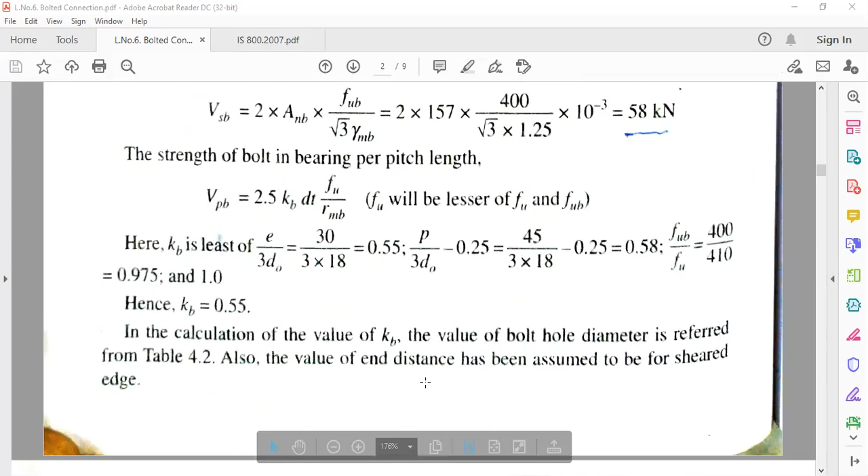We need to calculate the strength and efficiency of the joint, if four bolts are provided in the bolt line at a pitch of 45 mm, as shown in the figure. There are two types of figure given: one where the bolts are displayed in a single line, and another where the same four bolts are arranged in a double line, like a rectangular profile.

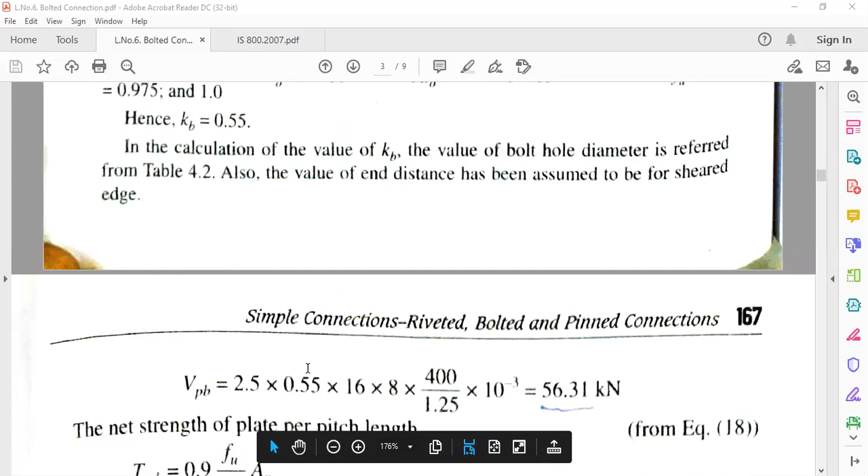Here it is a single line. The pitch, which is the distance between two consecutive bolts, is mentioned as 45 mm.

Also determine the efficiency of the joint if two lines of bolts with two bolts in each line are arranged to result in a double bolted double cover butt joint. So they have given a double cover butt joint with plate thickness of 8 mm, cover plate thickness of 6 mm, bolt diameter of 16 mm, grade 4.6, and pitch of 45 mm. We have to calculate the efficiency for both the single line and double line arrangements.

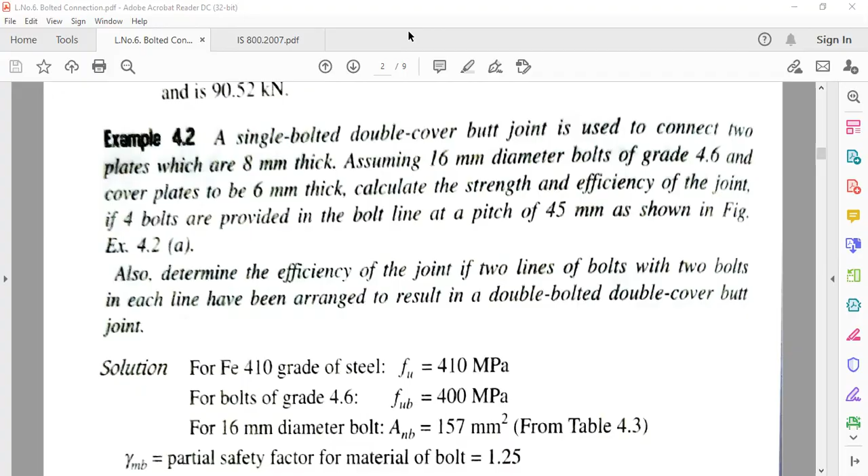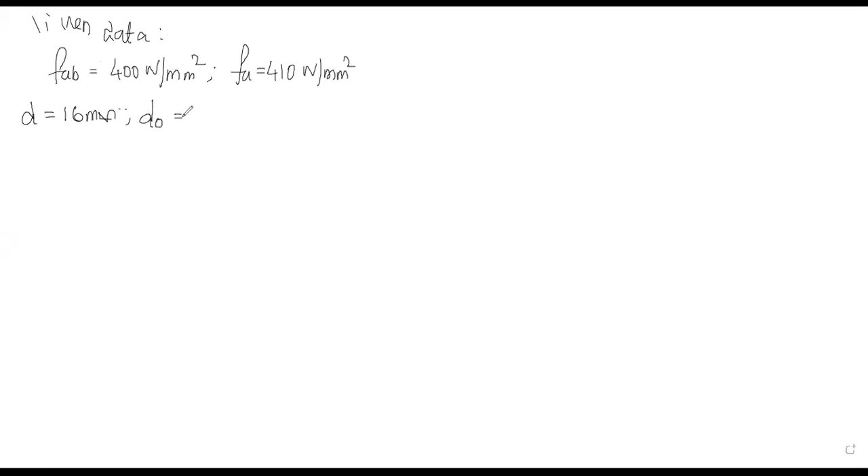Let's move to the solution. From the given data, FUB equals 400 Newton per mm square, which is the ultimate strength of the bolt. FU is the ultimate strength of the plate, assumed to be 410 Newton per mm square. The diameter of bolt D is given as 16 mm, so automatically D naught, the diameter of the hole, becomes 16 plus 2, equal to 18 mm.

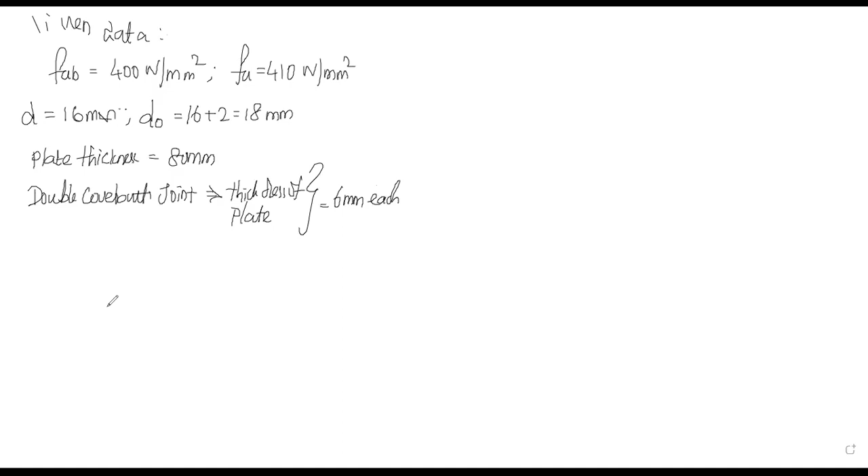Next, they mentioned the double cover plate thickness. The plate thickness is equal to 8 mm, and for the double cover butt joint, the thickness of each cover plate is equal to 6 mm. So these are all the given data.

Now, first we need to find the efficiency if the bolts are in a single line, given the pitch P is equal to 45 mm. Next, we find the efficiency if the bolts are in a double line.

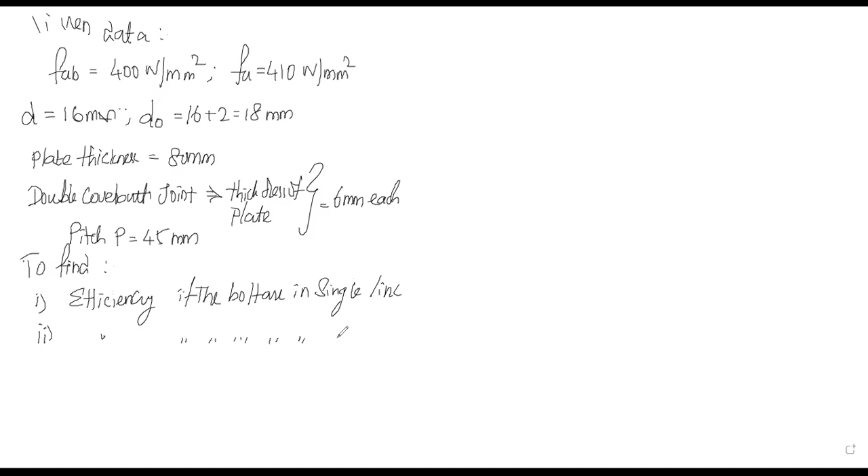They have mentioned 4 bolts in the diagram. We have to find the efficiency for both single line and double line arrangements, as shown in the diagram with 4 bolts.

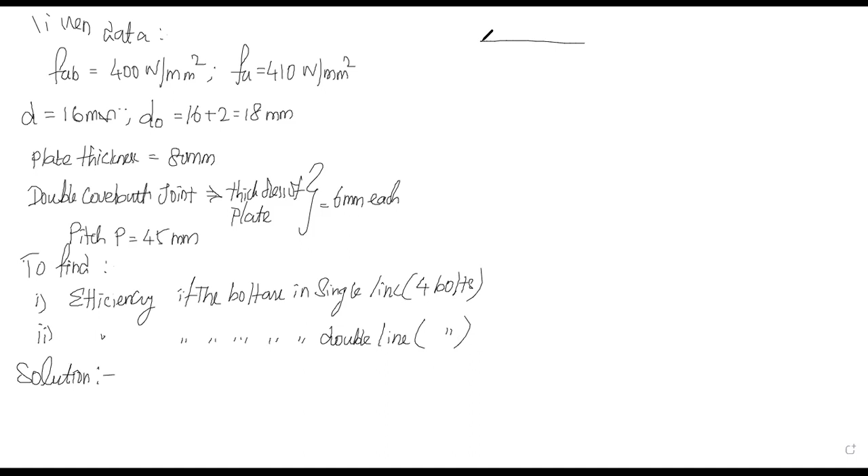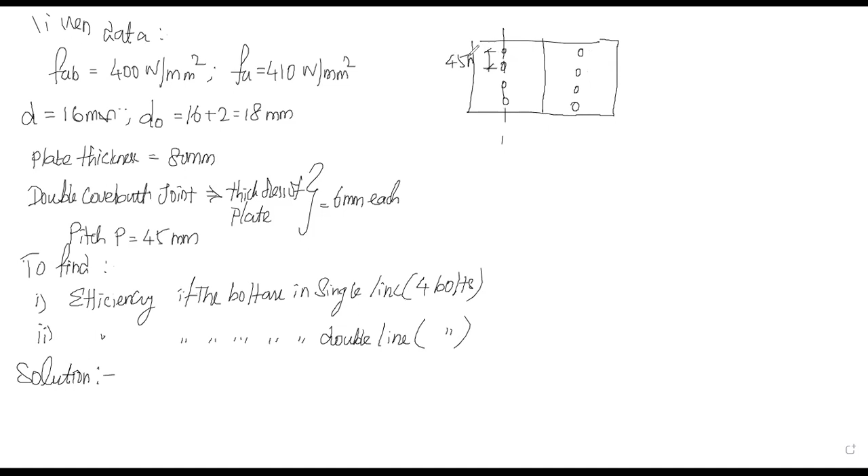Now let's move to the solution. In the figure there are two categories. In the first setup, the pitch is 45 mm in a single line. In the second category, the pitch is also 45 mm but arranged in a double line, with the same plate. For both the first and second categories, we are going to calculate the efficiency.

The formula for efficiency of joint is equal to strength of bolt divided by strength of the solid plate, multiplied by 100. This is the formula we are going to use.

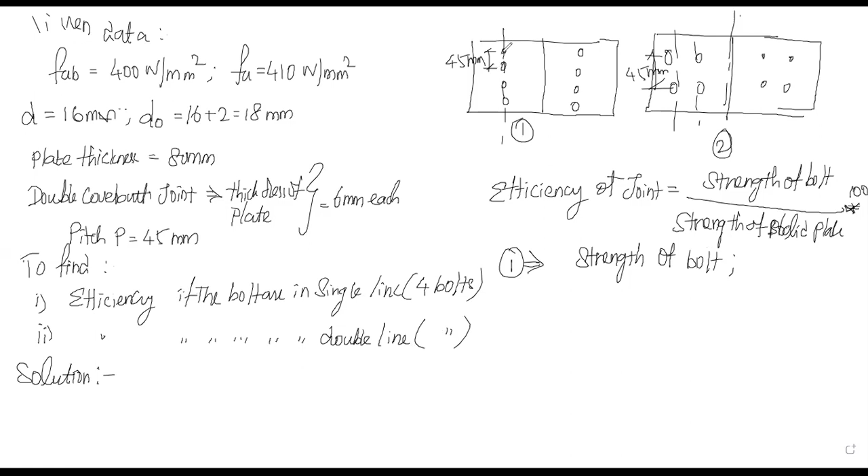Now for the first criteria, we calculate the strength of the bolt. We have to consider shear, bearing, and tension failure. The plate also gets tension failure. One thing to remember: since there is a single line, single shear is going to occur. But since it is a double cover butt joint, we are going to get double shear here.

So if I'm going to place the bolt here, on this shear plane and here another shear plane. So double cover, double shear.

So strength of bolt in shear. We know the formula VDSB is equal to VNSB by gamma MB, whereas VNSB is equal to, so gamma MB value we have taken from page number 30 in the table. So VNSB is nothing but FUB by root 3 into NN into ANB plus NS into ASB.

So here both are we are going to consider as a shank portion. So FUB is 400 divided by root 3 into NN. So 1 into ANB, so 0.78 into pi by 4 D squared, so dia of bolt is 16 square. Similarly, plus NS also we are going to take same 0.78 into pi by 4 16 square.

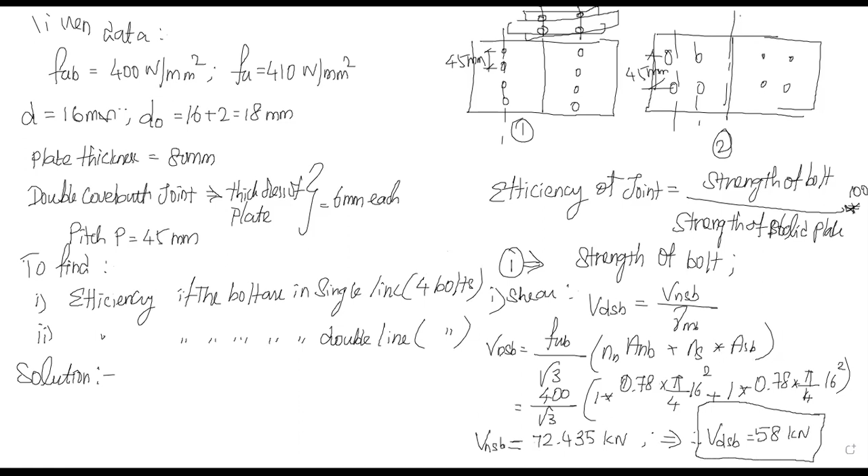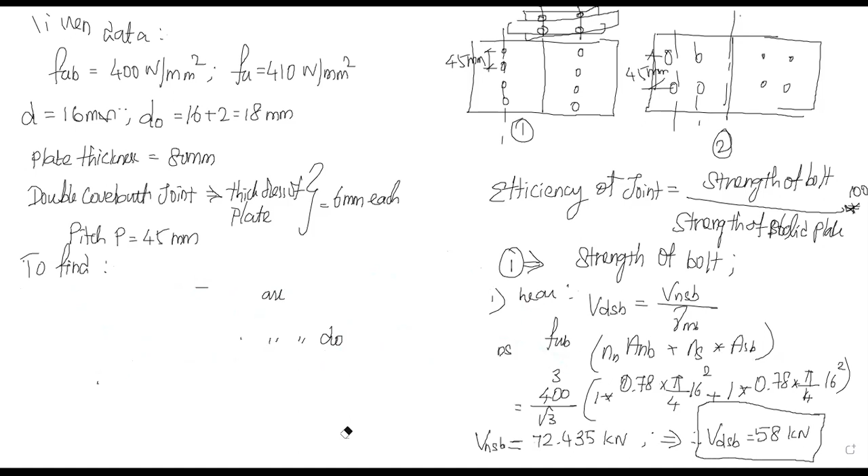So I will clear all the values. Second one is with respect to bearing strength of bolt.

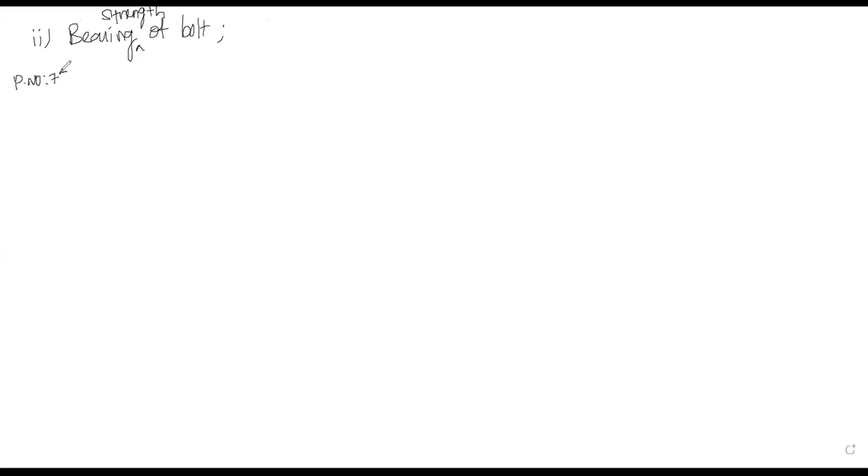So what we are going to do? From our page number 74 or 75 of IS 800 2007, the formula becomes VDPB is equal to VNPB divided by gamma MB, whereas VNBP is equal to 2.5 into KB into D into T into FUB.

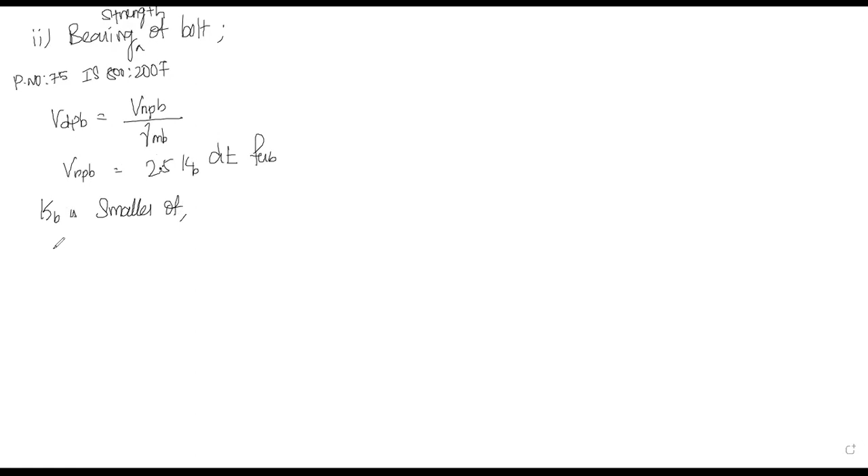So here KB is smaller of E divided by 3 times of D naught, comma P divided by 3 times of D naught minus 0.25, comma FUB by FU, comma 1, whichever is less.

So first edge distance E is equal to 3 times of D naught we are going to take. So 3 into D naught we have taken as 18, so 3 into 18 becomes 54 mm. So 54 mm, therefore 54 divided by 3 into 18, comma pitch they have given as 45, 3 into D naught minus 0.25. Next one is 400 divided by 410, comma 1. So 54 divided by 3 into 18, the value is 1.

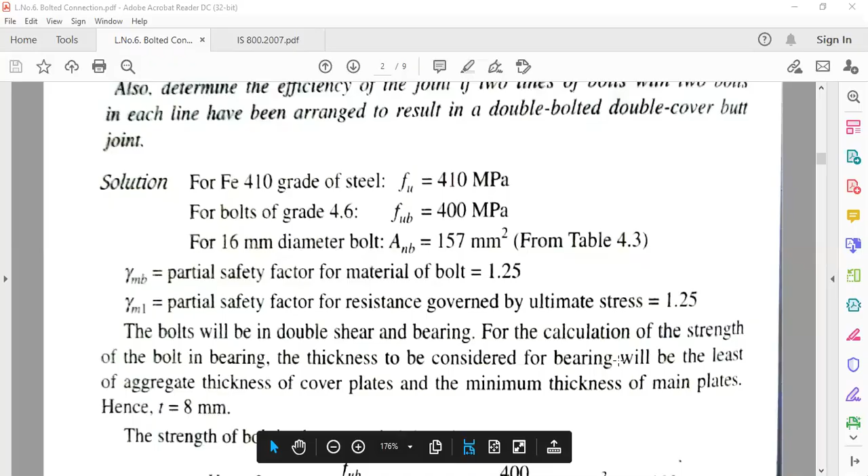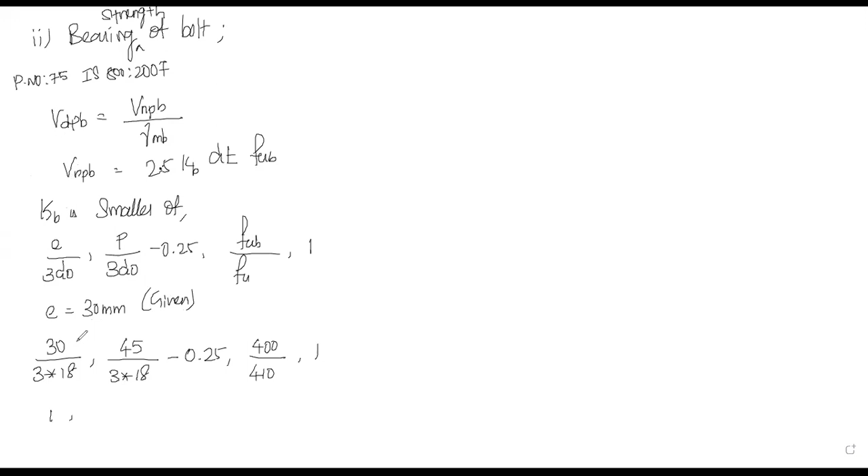So let us move on to the problem again. So E value they have given as 30 mm. So E value is 30, so 30 divided by 3 into 18, so 0.55, comma 45 divided by 3 into 18 minus 0.25.

So it becomes 0.58, comma 400 divided by 410, it becomes 0.975, comma 1. Among them, this is the small value, so KB is equal to 0.55.

Next, we should move on to the values. That is VNBP is equal to 2.5 into KB value is 0.55, and D dia of bolt is 16 mm, and the thickness of plate.

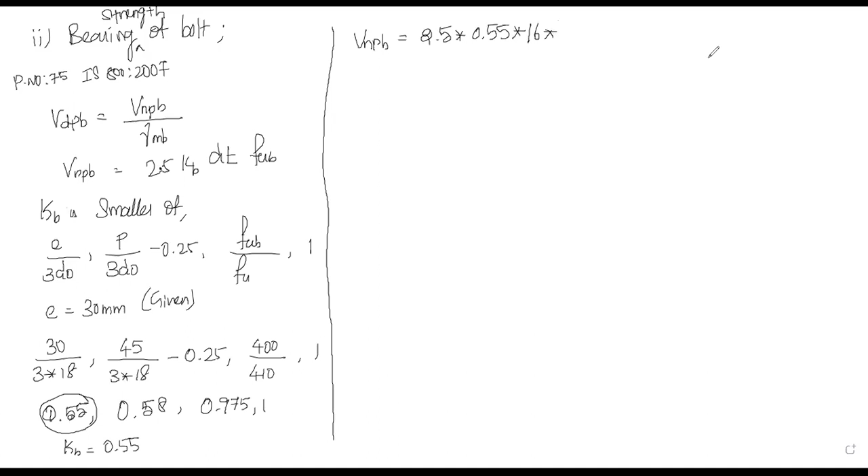So you may have one doubt. So the regular plate, whatever we are going to join now, that is 8 mm. Now cover plate we are going to keep 6 mm too, so together this is 6 mm and this is 6 mm, so together it is 12 mm, 2 into 6 mm, it becomes

12 mm. So among them, this 8 and 12, whichever is less, this 8 is less, so that we are going to take it. So 8 into FUB, that is 400. Therefore VNPB is equal to 2.5 into 0.55 into 16 into 8 into 400, answer divided by gamma MB

if I am going to give, so 70.4 we are getting, 70.4 kilonewton we are getting. Therefore, VDPB is equal to 70.4 divided by 1.25, so 56.320 kilonewton. This is the value of bearing strength of bolt.

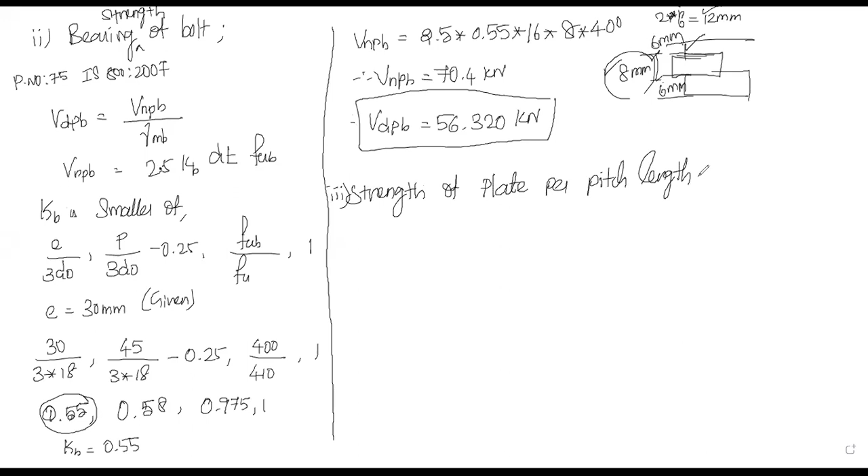Next we have to calculate the strength of plate, the third one, strength of plate per pitch length. So why am I saying this? For bolt, we are going to take shear and bearing. Similarly for plate, bolt and plate, all the things we can have. Even if bolt is strong and the plate fails, that is also a failure. So we are going to calculate the strength of plate also, based on these three values: shear strength of bolt, bearing strength of bolt, then strength of plate per pitch length. Among these three, whichever is less, that is the strength we are going to take.

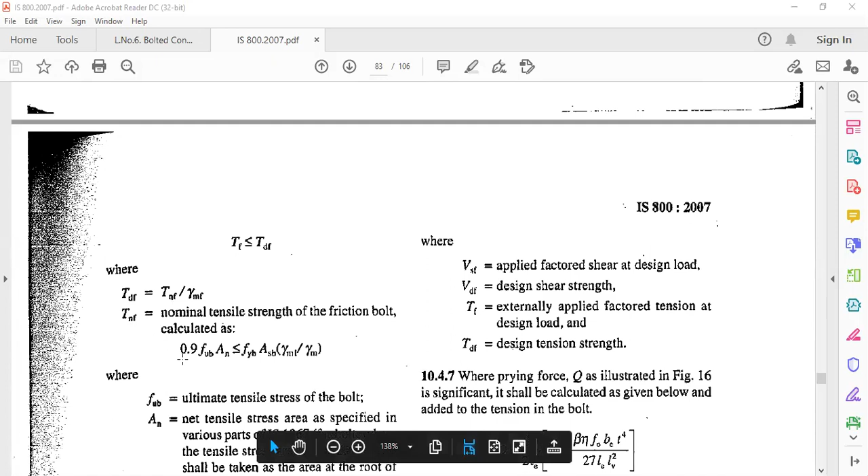So now we should move on to that. This formula we can refer from IS 800. In IS 800, page number 77, the value is available. That is tension resistance: 0.9 into FUB into AN. So this is the formula we are going to use.

If it is bolt, then we are going to use FUB. If it is plate, then we are going to use FU, that is ultimate strength of plate. So here we are going to use, for plate, ultimate strength of plate, 410 Newton per mm square.

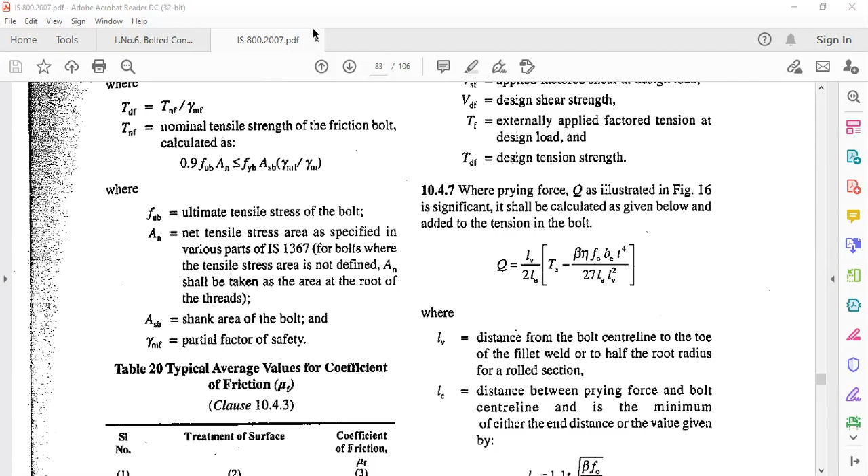Let us move on to the problem again. So the formula becomes TDN is equal to 0.9 into FU into AN divided by gamma M1. Gamma M1 value we are going to take from table number 5, page number 30, from IS 800, that value becomes 1.25. Now we are going to calculate the strength per pitch length.

So net area becomes - here a bolt is there, here a bolt is there. The center to center distance becomes 45 mm. In that, the dia of hole we have to deduct. Here half of the dia, here half of the dia is available. So the net area becomes the length 45 minus dia of hole, that is pitch minus dia of hole, into thickness of plate. So pitch is 45 mm, minus dia of hole is 18 mm, into thickness of plate is 8 mm.

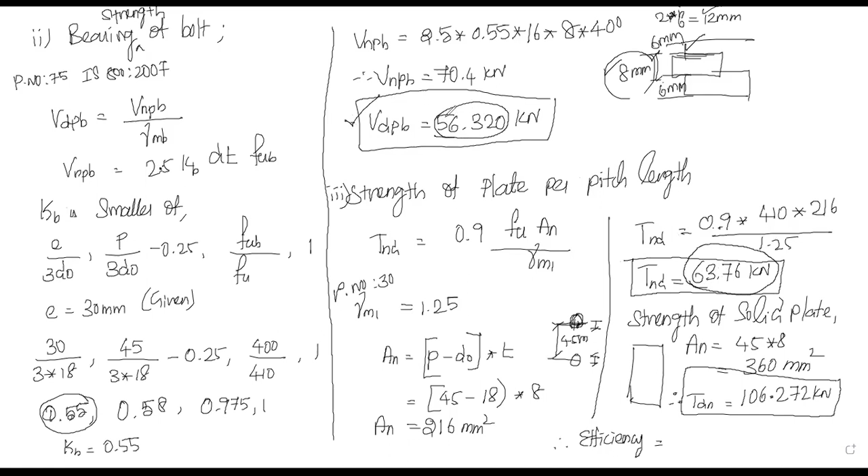Now efficiency. For the first question, efficiency is equal to strength of joint divided by strength of solid plate - among these three values, bolt as well as plate, whichever is less, we have to take. For shear, the value is 58 kilonewton. For bearing, the value is 56.32 kilonewton. For tension of plate, the value is 63.76. Among them, the least value is 56.32 kilonewton.

56.32 kilonewton divided by TDN, that is strength of solid plate, 106.272, into 100. So how much value? 56.32 divided by 106.272 into 100 gives 53 percentage, that is 52.99 percentage. 53 percentage is the efficiency of that bolted joint, if it is placed in a single row. So if it is in single row, whatever we discussed, this is the efficiency we are getting.

Now we are moving on to: if the bolts are placed in double line, then what is the efficiency - that we are going to discuss.

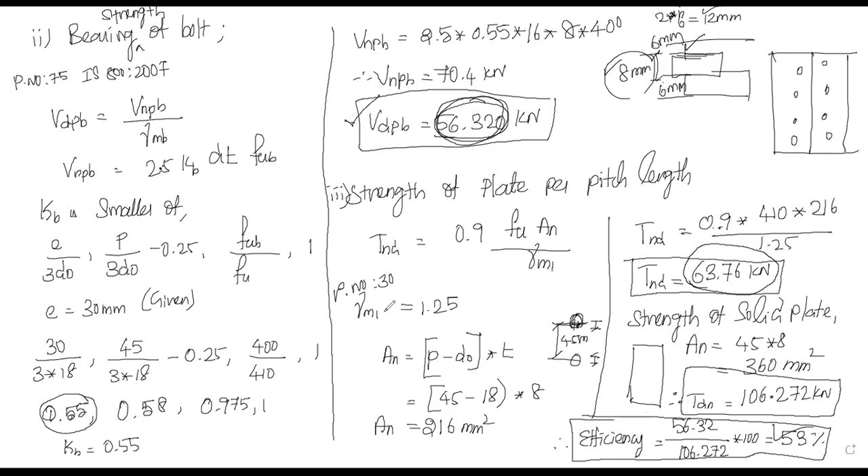So let us move on to the topic. Second criteria, efficiency of joint, if the bolts are in double line. First, let me draw the diagram as given.

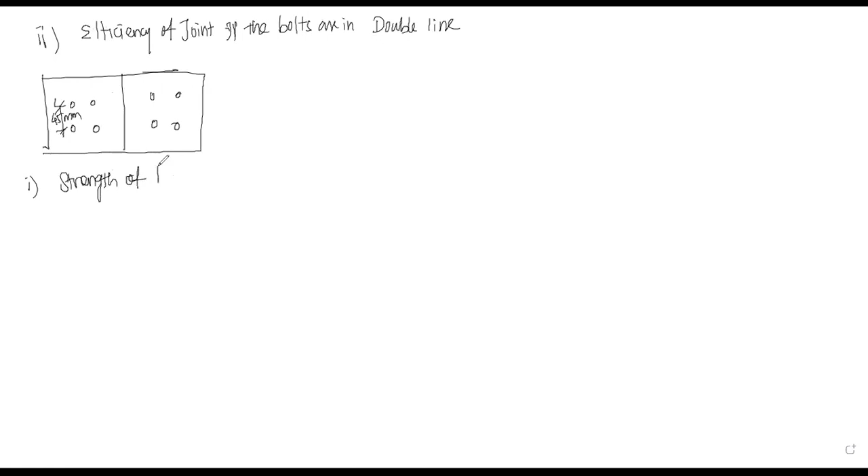So this is pitch length 45. The thing won't change, that is as usual. First one, strength of bolt in shear.

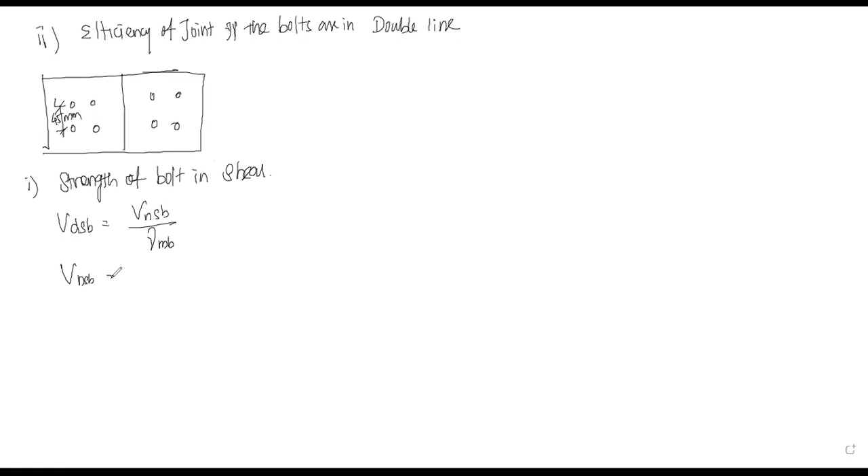The same formula, VDSB is equal to VNSB by gamma MB. Here also VNSB is equal to FUB by root 3 into NN into ANB plus NS into ASB. Here also double shear, since they have mentioned double cover butt joint, so one cover is here, one cover is here. If I place the bolt here, here I can get shear, here I can get shear, so it is double shear. The value won't change. VNSB, that is VDSB, becomes 58 kilonewton.

The thing is, the bolt has been placed in a double row. Here one is available and here one is available. If I apply the force, it will resist two times instead of a single time. So this value can be multiplied with 2. So 58 into 2, 116 kilonewton is the value.

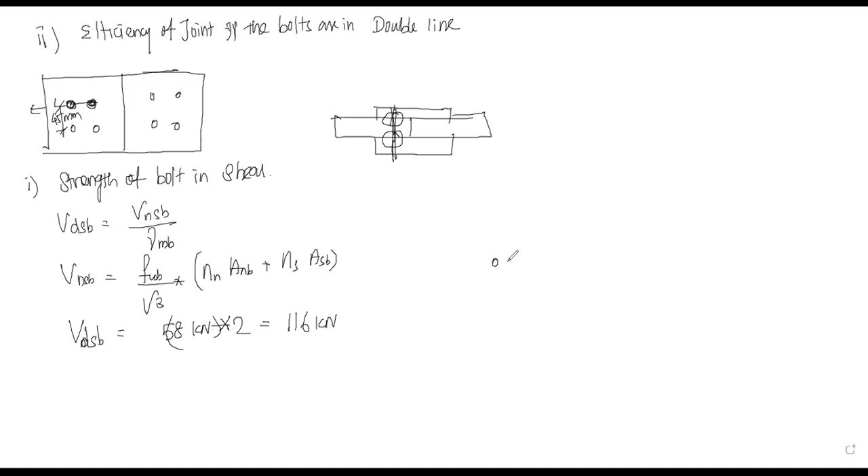One thing we have to remember: if I'm applying the force here, this bolt also resists some force, and this bolt also resists some force. So as the number of rows or columns increases, when applying in the direction of force, automatically the resistance also gets increased. Based on the number of bolt lines, we multiply the values in the corresponding strength. So shear is over.

Second one is strength of bolt in bearing. VDPB is equal to, earlier we got the answer as 56.32 kilonewton. Multiplied with 2, so 56.32 into 2 becomes 112.64 kilonewton. Next we should move on to strength of plate, that is strength of plate per pitch length.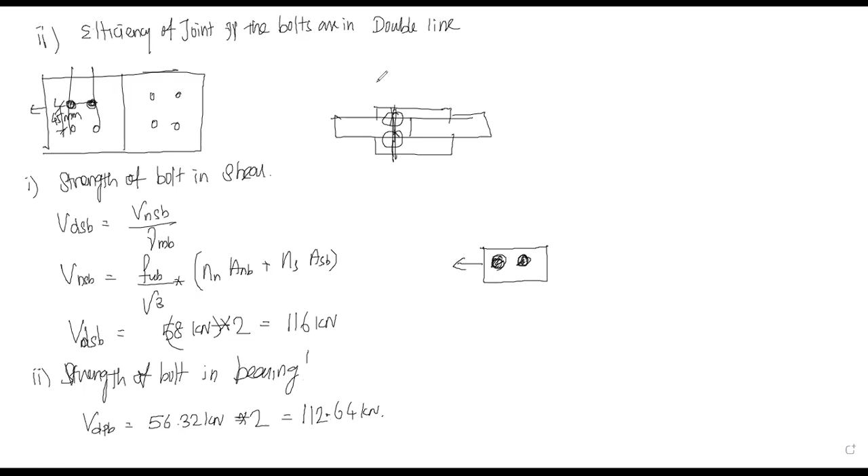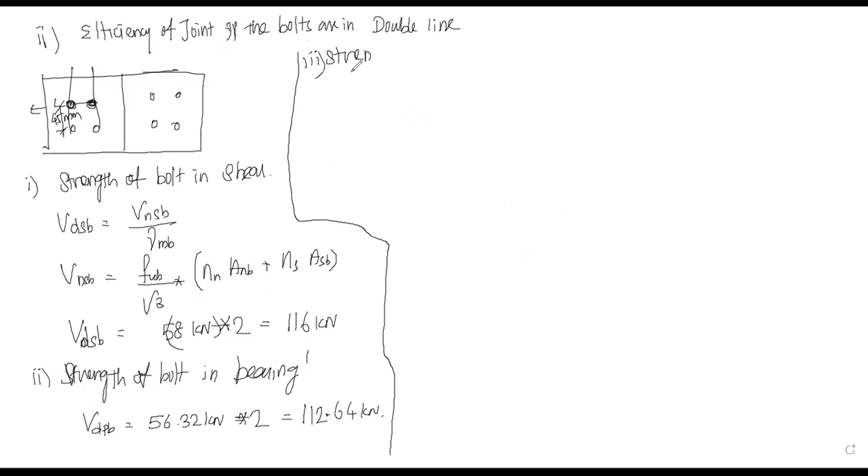That is the third one, strength of plate per pitch length. Here, as usual, one bolt is here, one bolt is here. By placing together, the pitch length won't change, 45 mm, so we get the same value.

Earlier we have seen that TDN is equal to 0.9 into FU into AN divided by gamma M1. Gamma M1 is equal to 1.25, and the AN value for this is 45 minus 18, that is P minus D naught, dia of hole, into thickness. Thickness is 8 mm, so 216 mm square we got. If I substitute this value, the TDN becomes 63.76 kilonewton.

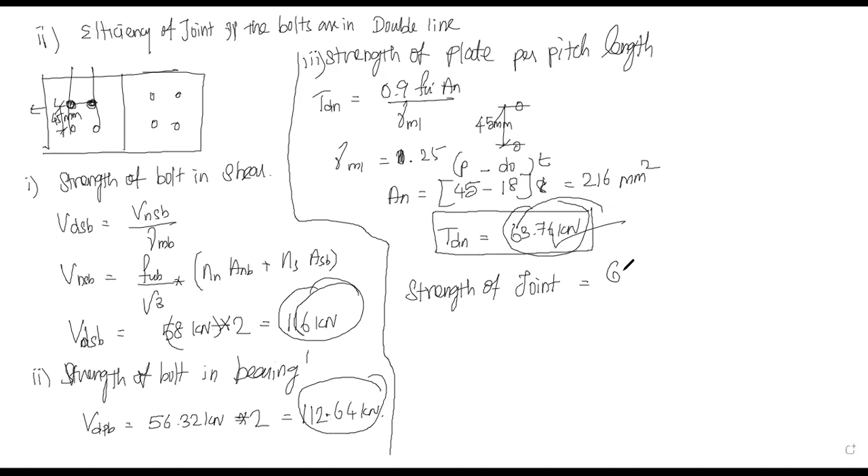So now the strength of joint or strength of bolt is nothing but the least of these three values: 1, 2, and 3. Among them, this is the least one, 63.76 kilonewton is least. Therefore, strength of the joint is this value. Now for strength of solid plate.

TDN is equal to 0.9 FU into AN divided by gamma M1. AN value is 45 into thickness, thickness is 8 mm, so 360 mm square. The value of TDN for strength of solid plate becomes 106.27 kilonewton.

Therefore, efficiency of joint is equal to strength of joint divided by strength of solid plate, multiplied with 100. So the value becomes 63.76 divided by 106.27 into 100, which gives 59.99, so it is nothing but 60 percentage. So this is the answer.

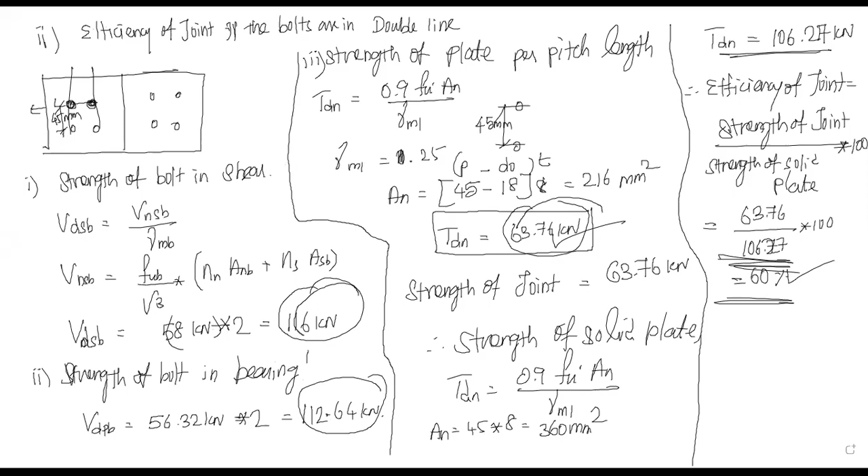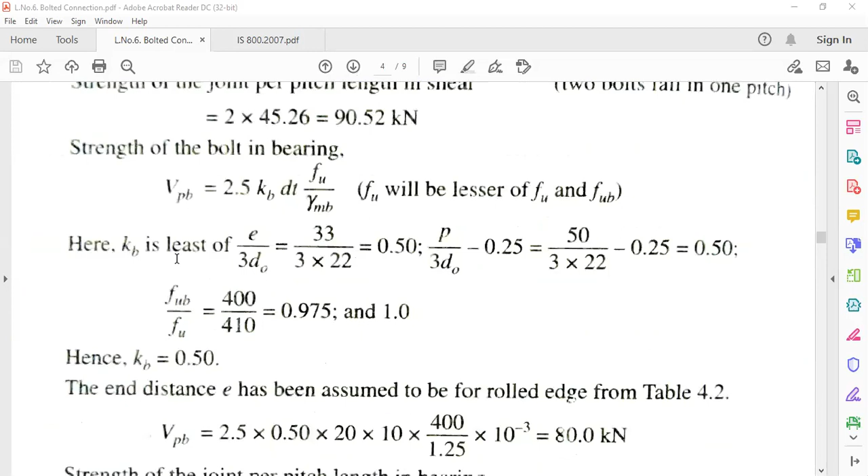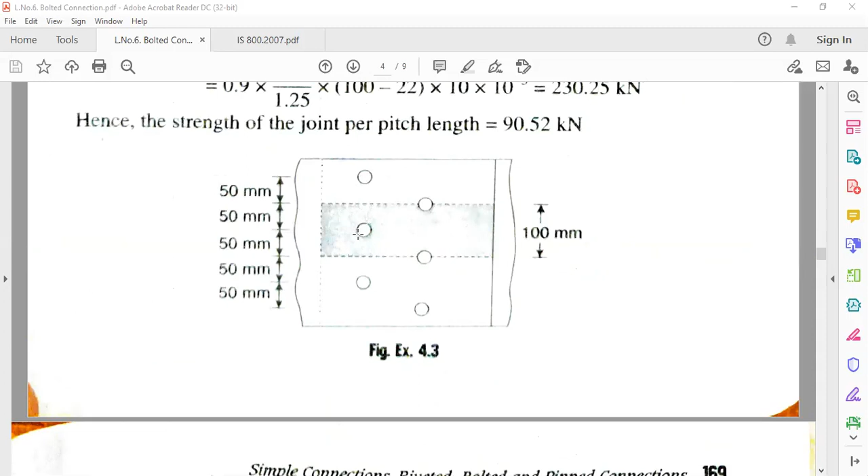So the next problem: determine the strength and efficiency of the lap joint as shown in figure 4.3. Here the plates are given, and the bolts have been arranged in a zigzag way. So if it is in zigzag way, the pitch length, one bolt to another, the distance is 100 mm. Similarly here, one place to another place.

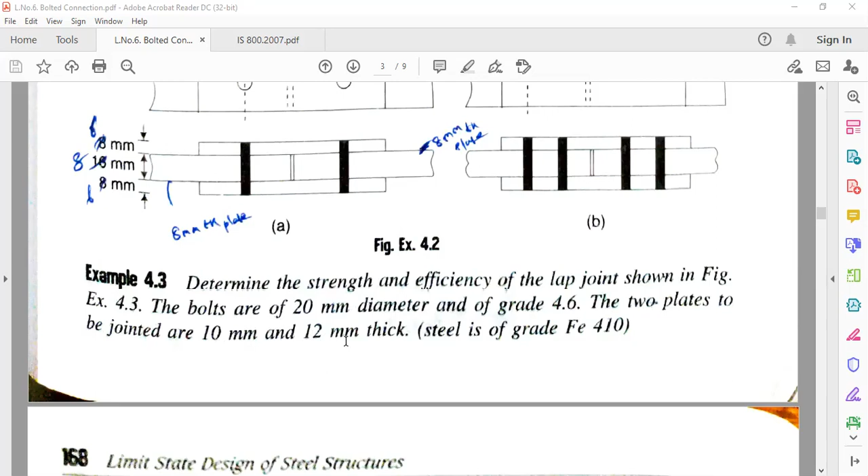What they have asked: the bolt diameter is 20 mm, so D value is 20 mm, grade is 4.6, so FUB becomes 400 Newton per mm squared. The two plates to be joined are 10 mm and 12 mm thick. So joined plates are 12 mm and 10 mm, one plate is 10 mm, another plate is 12 mm. So we are going to join the lap joint.

Now let us move on to the solution.

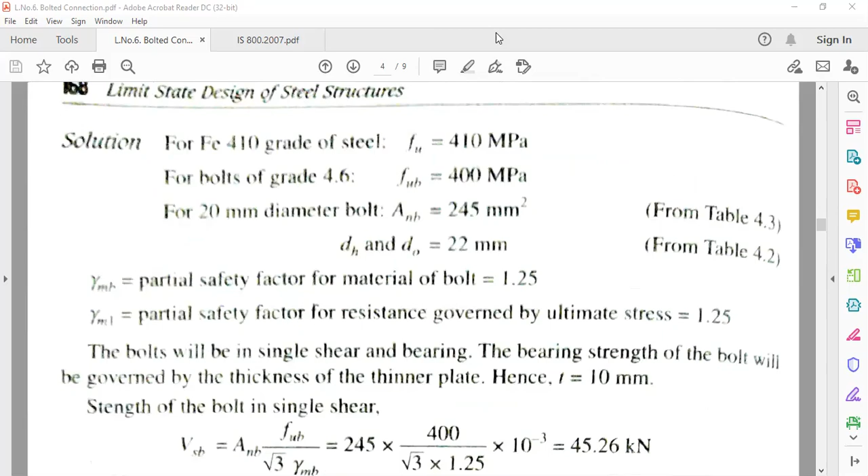The given data: FUB is equal to 400 Newton per mm squared. FU is 410 Newton per mm squared. It is a lap joint they mentioned, and dia of bolt they have mentioned as 20 mm. D is equal to 20 mm.

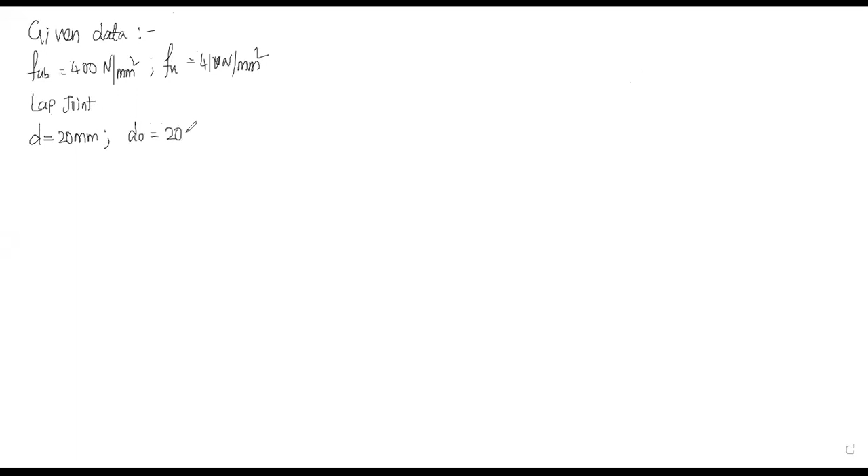So D naught we have to add 2 mm, 20 plus 2 mm. This is from page number 73 of IS 800, the values are given. That's why I'm going to take 2 mm as clearance. So dia of hole is equal to 22 mm, D naught.

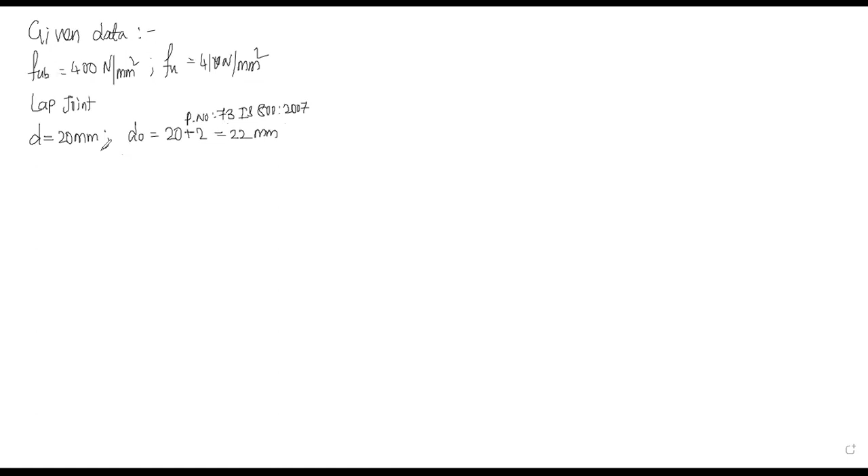Next, lap joint: one plate thickness is 10 mm and another plate thickness is 12 mm. So there are two plates. Let us move on to the solution. Find the efficiency of the joint.

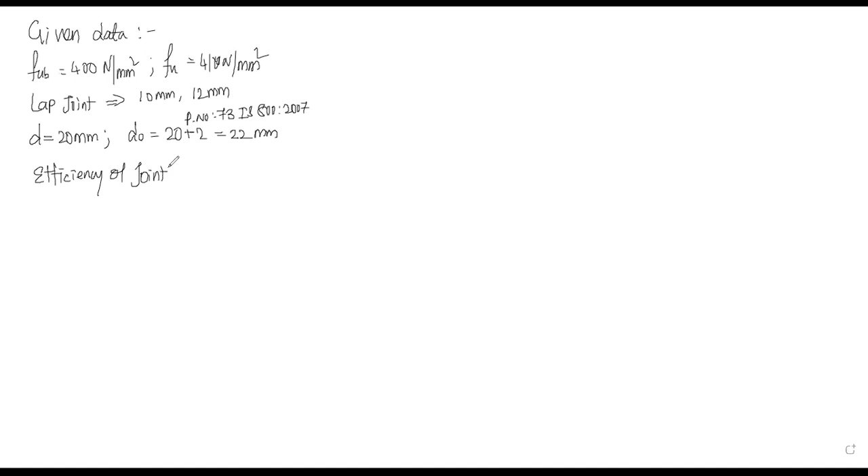Now they have mentioned the diagram, that is two bolt pitch arranged like this. So one pitch is 100 mm, the center to center distance between the two bolts. They didn't mention the edge distance, so that we are going to calculate.

So next we should move on to the problem. First, strength of joint we have to calculate. So efficiency, what is the formula? First we note down the efficiency formula, then we will move on.

So efficiency of the joint is equal to strength of joint divided by strength of solid plate, into 100.

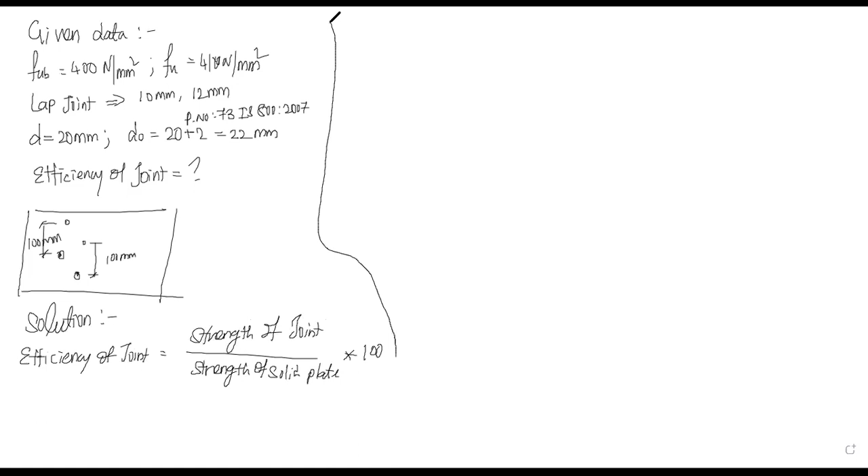So strength of joint is the least of: first, strength of bolt in shear; second, strength of bolt in bearing; third, strength of plate per pitch length. So these things we have to calculate now.

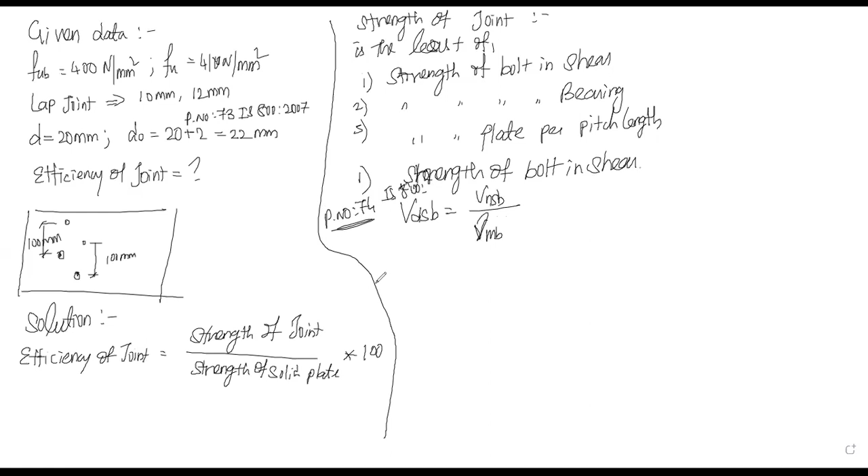So first one, strength of bolt in shear. The formula VDSB is equal to, from page number 73 or 74 of IS 800: VDSB is equal to VNSB by gamma MB, whereas VNSB is equal to FUB by root 3 into NN into ANB plus NS into ASB.

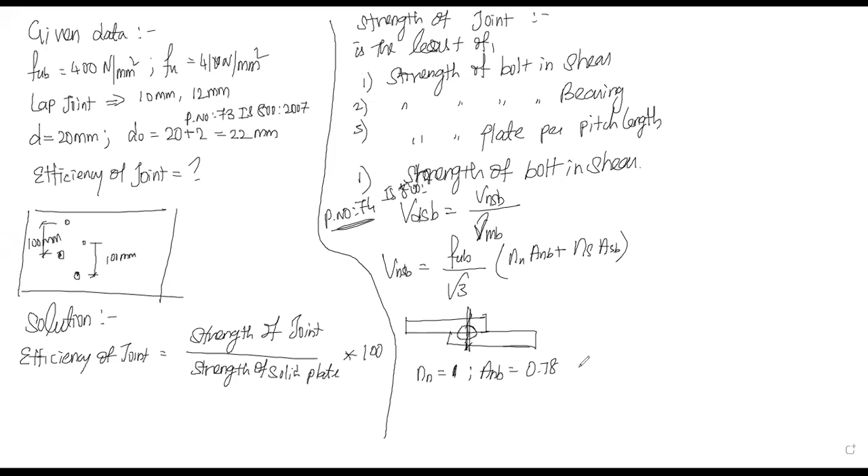So here lap joint they have mentioned, so it is only possible to have single shear. So NN is equal to 1 and ANB is equal to 0.78 into pi by 4 into D square. D is equal to 20 mm, we know that. Therefore ANB becomes 0.78 into pi by 4 D square, so 245 mm squared.

Next, here NS is equal to 0, so automatically this term becomes 0. Therefore VNSB is equal to FUB 400 divided by root 3 into 1 into 245, so how much? 56.58 kilonewton. Therefore VDSB is equal to 56.58 divided by 1.25, so the answer becomes 45.26.

So VDSB is equal to 45.26 kilonewton, this is per pitch. So per pitch we are having two rows, that is two lines of bolted connection. So the value has been multiplied by 2. Therefore VDSB is equal to 2 into 45.26, which becomes 90.52 kilonewton, since two lines of bolts are there.

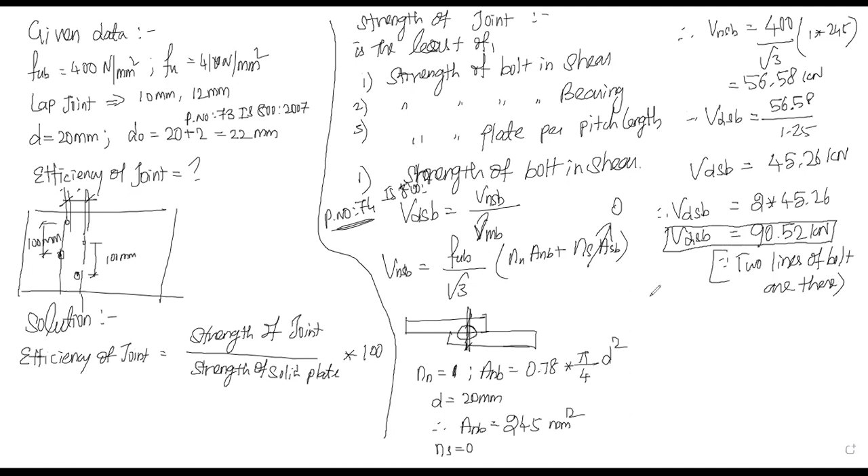So next, with respect to bearing, the bearing strength of bolt.

So the formula from IS 800 page number 74 becomes VdPb is equal to Vnpb by gamma mb, whereas Vnbp is equal to 2.5 into Kb into D into T into Fub, whereas Kb is equal to smaller of.

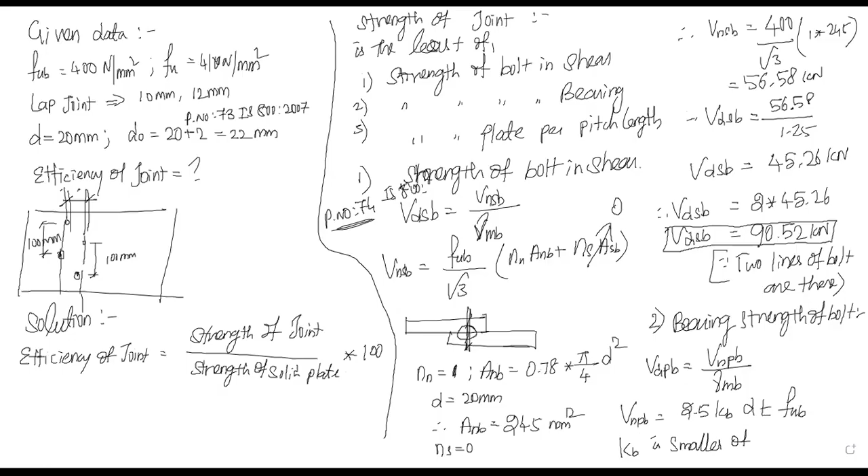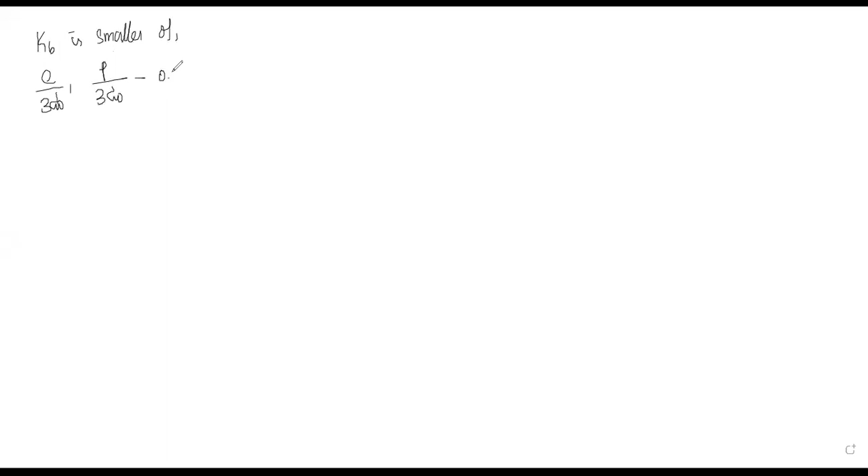So remaining thing, I will erase the things whichever I don't want. So we know that Kb is smaller of E divided by 3 into D naught, comma P divided by 3 D naught minus 0.25, comma FUB by FU, comma 1.

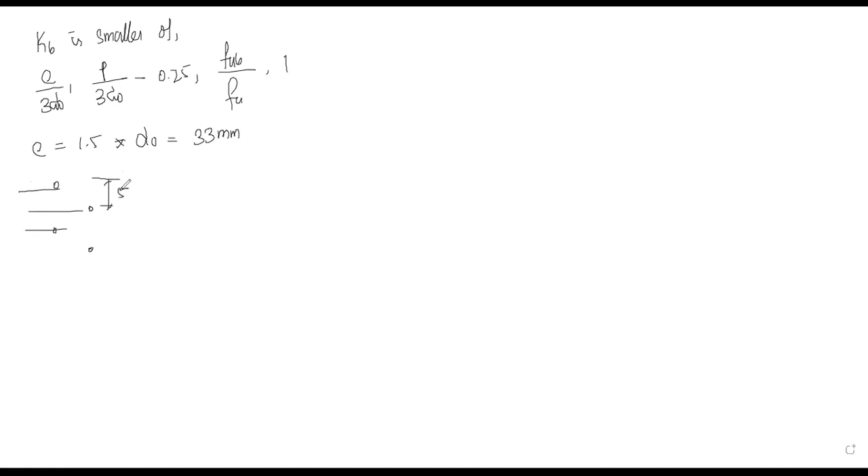So in this, E value is nothing but 1.5 times of D naught. So if I'm going to substitute, I'm getting the value as 33 mm, and pitch they have mentioned, so like this it is available in the diagonal. So from one bolt to another consecutive bolt, the distance is 50 mm. But if I'm going to take from here to here, it is 100 mm, and similarly from here to here it is 100 mm.

So among them, I'm going to take this distance, so this P is equal to 50 mm. So if I'm going to substitute these values, I'm getting first one as 0.5, second one as 0.55, and third one as 0.975. So the Kb value is the least of above, so 0.5.

So if I'm going to substitute in the formula of Vnbp is equal to 2.5 into Kb into D value, dia of bolt 20 mm, into thickness of plate - 10 mm or 12 mm plate we are having, so among them which one is less, 10 mm is less, that we are going to take it, into FUB 400.

So if I'm going to substitute these values, I am getting the value of 100 kilonewton. So therefore VdPb, the design strength, becomes 100 divided by gamma MB which is 1.25. So the value is 80 kilonewton.

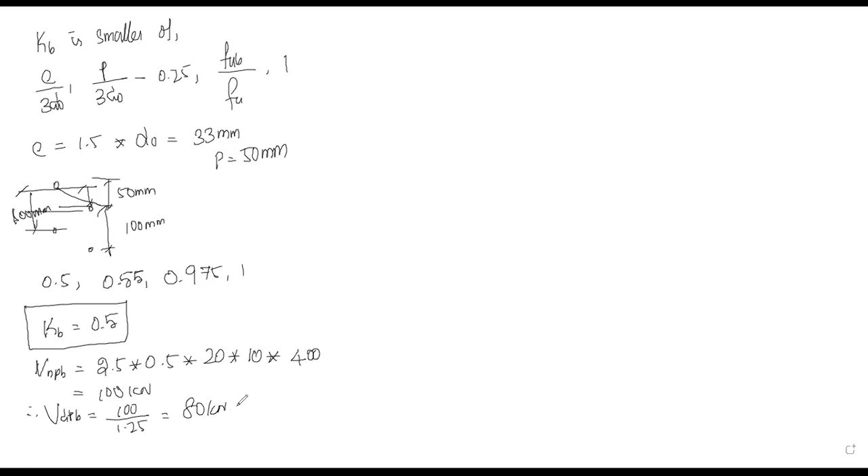Now what we are going to do now? So bolts are placed in two lines, so VdPb becomes 2 into 80 kilonewton, so it becomes 160 kilonewton.

Okay, we have already found that the design strength due to shear becomes 90.52 kilonewton, that we have calculated already. So first due to shear, due to bearing, so third one we have to calculate strength of plate per pitch length.

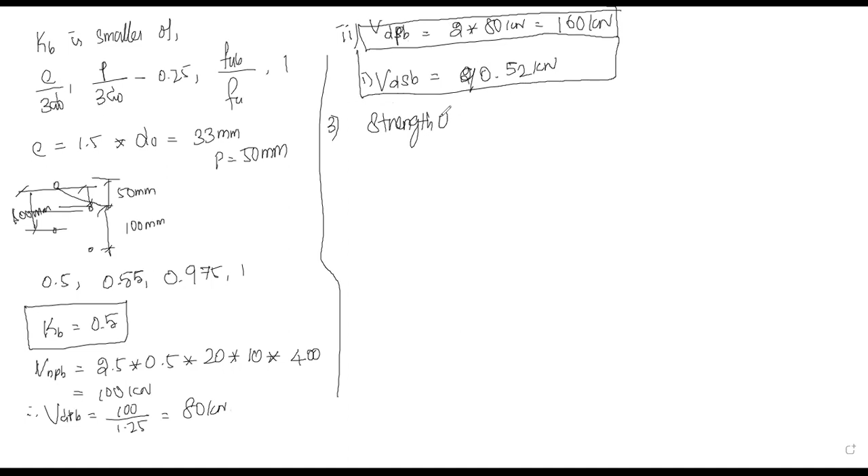So here pitch, so the failure may happen - the tension failure may happen, that is tensile strength, nothing, whatever. So here to here, if I'm going to get failure in this line or in this line, so the bolt number are equal.

Now so the pitch length becomes 100 mm, they have mentioned already. So the formula is from page number 77 of IS 800: TDN is equal to 0.9 into FU into AN divided by gamma m1. So gamma m1 equal to, from the table of page number 30, 1.25.

AN is pitch minus dia of hole into thickness of plate. So here pitch is 100 mm minus dia of hole is 22 mm, into thickness whichever is less - 10 mm is less, that we are going to use. So 100 minus 22 into 10 gives 780 mm square.

So if I'm going to substitute, I can get the value of TDN. So 0.9 into FU 410 into AN 780 divided by 1.25. So if I'm going to calculate these values, I'm getting the answer as 230.256 kilonewton. This is the strength per pitch length.

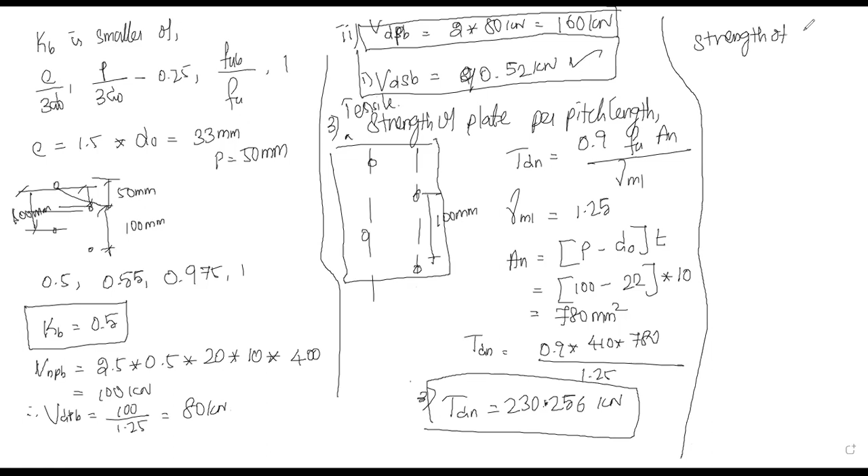Okay, next we have to calculate, so among these three, which one is less value? 90.52 is the lesser value. So now we are going to tell that the strength of joint is equal to 90.52 kilonewton.

Next I need strength of solid plate, that means without the deduction of dia of hole. So TDN is equal to 0.9 into FU into AN by gamma m1. So here AN is equal to pitch length directly multiplied with the thickness, so pitch length is 100, thickness is 10, so 1000 mm square.

Therefore TDN becomes, so 0.9 into FU is 410 and 1000 area, then divided by 1.25. So 295.2 kilonewton is the value.

Therefore efficiency - efficiency of the joint is equal to strength of the joint divided by strength of the solid plate multiplied with 100. So 90.52 divided by 295.2 multiplied with 100. So if I'm going to give this, I'm getting the value as 30.66 percentage. So this is the efficiency of this joint.